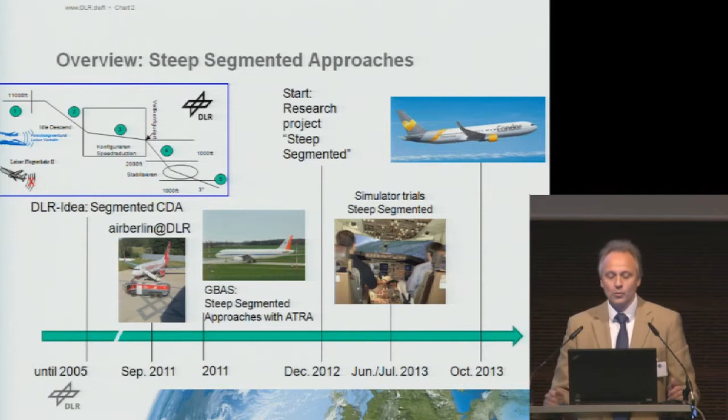A lot of simulator trials with Lufthansa, Condor, TUI Fly, etc. followed suit. And on the 4th of October 2013, that is 3-4 weeks ago in Frankfurt, we also started flight tests with Condor. That was the overview.

Here you can see some further data, beautiful data. In 2011 in Braunschweig, we had steeper approaches of 3 degrees up to 5.5 degrees with a 737-700, and there were 2 points where we had measurements, and there were differences of 3-4-5 dBs with the distances here, and that's really happy - that's really positive, but there were only a few measurements that are not representative. That was a trend where we said,

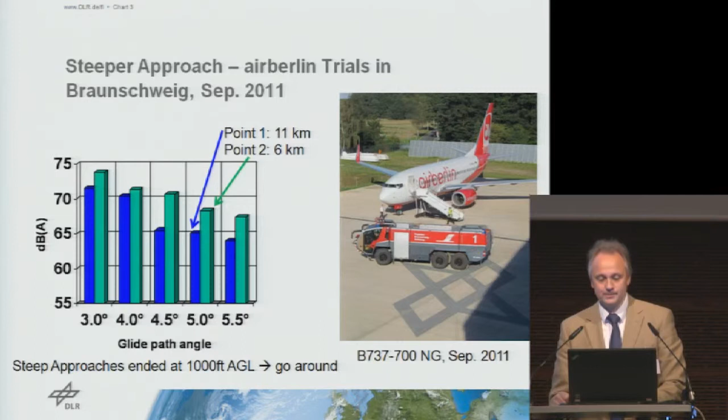yes, that's good. The research project as such has several parts. The first part has been concluded. We studied together with pilots, with our own ideas, our internal people, so we wanted to find how the vertical profile of the steep approach would be designed, so that we can not only do it with our systems, but also with systems that are available in aircraft today. So this is what we tested in the simulators.

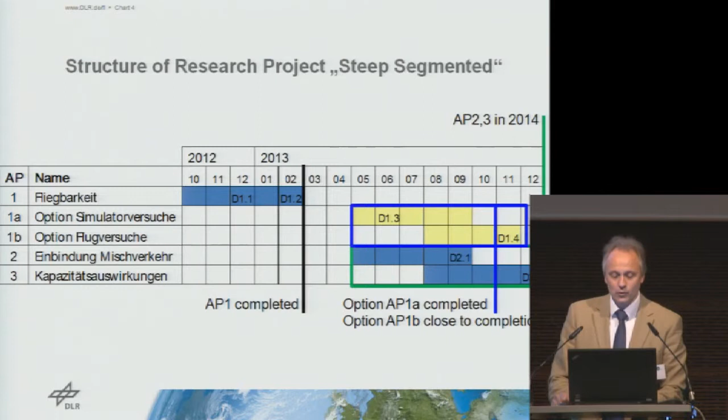And as it worked so positively, Condor said, we want to fly it. So they made an aircraft available. And together with Deutsche Flugsicherung, with Fraport, with the Umwelt- und Nachbarschaftshaus, we did it on the 4th of October and really actually flew it.

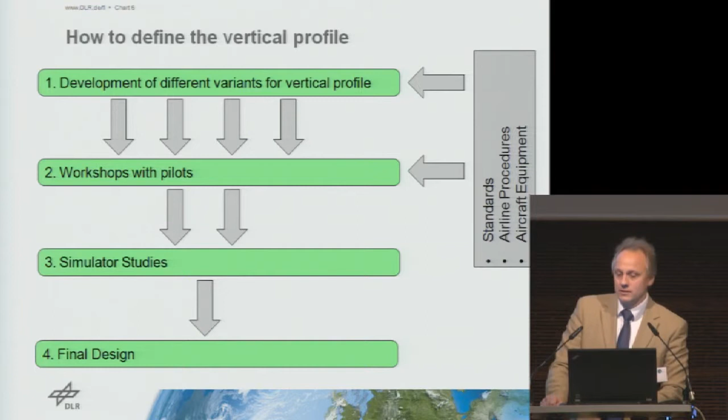Now, we looked at all possible vertical profiles, how you could fly them. We elaborated several variants, and then intensively in several workshops we met pilots, talked about it, and all rules and regulations that we found were used. We produced fewer variants and tested them in the simulator again, 2 or 3 of them, and then we came up with the final design.

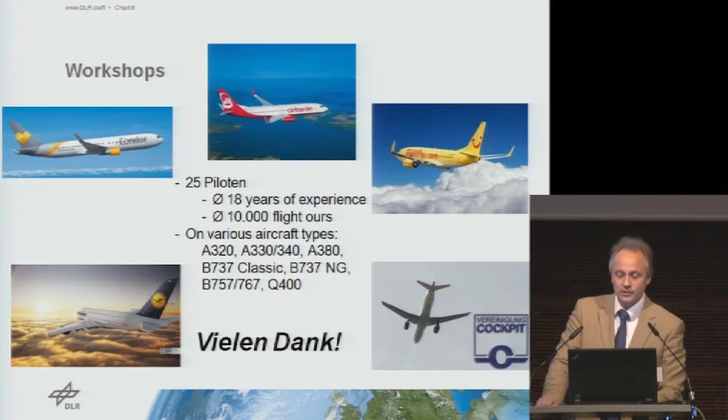The workshops were carried out with Lufthansa, Condor, Air Berlin, TUI-Fly, and pilots of different airlines that belong to the cockpit group - 25 pilots, highly experienced, and many different patterns were really looked at: the A320, the Q400, etc. It was really great fun to do it together with the pilots. Thank you very much to you. In the simulator, we were with Condor, TUI-Fly, and Lufthansa.

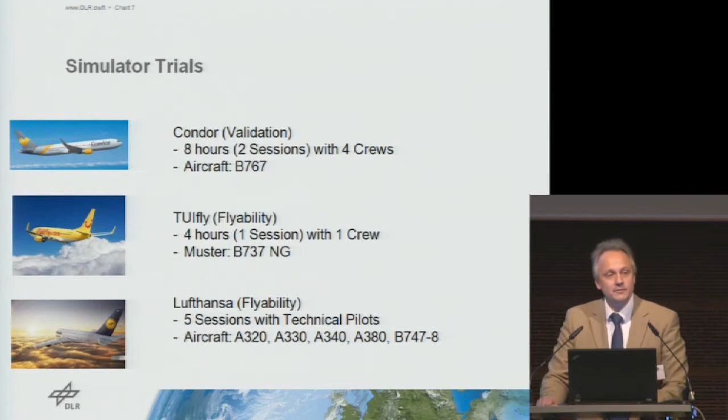767, 737, A320, A330, A340, A380, and B747-800. So all these aircraft flew that route.

We start with 8,000 feet, not 5,000 as we do today, and then descend with 4.49 degrees. You might ask, why 4.49? It must be under 4.5. If I do it at 4.5 with the published glide angle, slope angle, the plane has to prove that this angle plus 2 degrees more can be flown stationary without acceleration. Under 4.5 degrees this is not necessary, so that's a decent limit. So 4.49 degrees was the result then.

That's what we did. Later on we would like to land with 3 degrees on ILS, so we need a transition between the 4.49 degrees and the 3 degrees, so that at the latest, with the typical height of 1,000 feet, we would be completely established on the final approach—landing configuration, landing speed, everything in order at 1,000 feet. To have some margin, if you calculate backwards, this bending point should be at 1,500 feet. In theory 1,300, 1,200 should be sufficient, but then probably you don't have that much buffer. So 1,500, that should be it. There is still some room there.

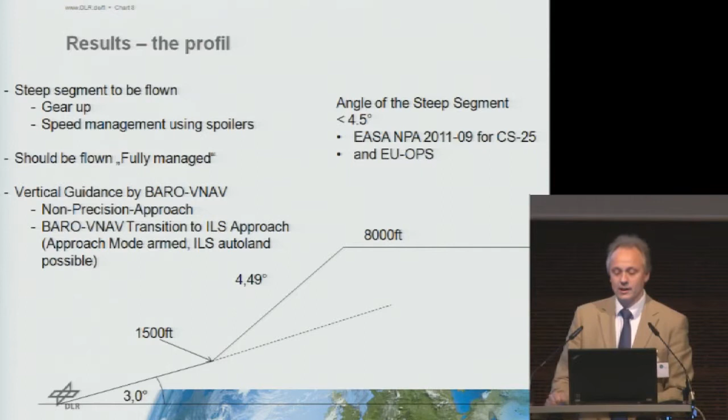The vertical profile, the FMS with BARO-VNAV—that's the non-precision approach. And if we want to land, we have to do it as a BARO-VNAV transition to ILS approach. We have to define it that way so that we can capture ILS and do an auto land. That's the idea.

We tested it in the simulator, where we had the average speed for the steep segment of 400 knots, so it should not be too much for ordinary traffic situation in Frankfurt. And then 170 knots, sorry. And then we determined certain conditions for the plane and the crew: 40 degrees higher temperature, and 25 knots tailwind were added to the steep segment. We heard tailwind with steeper approaches.

It's not so pleasant, but it's possible. You can fly it, also with the landing gear not set. It was possible with the A340 and also the B767. Without tailwind, also with non-set landing gear, we can do it with the A320, but not at the high temperature. And we can also do it with the B747-8. The only plane that required a different procedure is the 737.

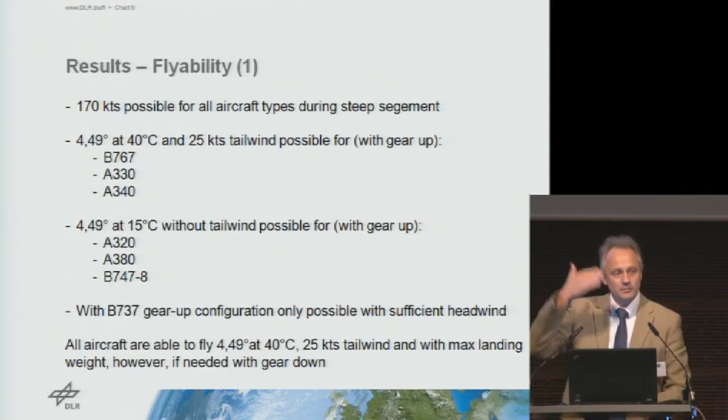Which would fly it only with landing gear not set, with sufficient headwind. Otherwise the landing gear should already be set in the steep segment. But even with unfavorable conditions, also with the 737, with 25 knots tailwind, max landing weight, the 4.5 or 4.49 degrees can be flown. We can do it. It's possible.

And this is what we produced in terms of results in the simulator: flyability, limits for wind, etc. For the A320 we didn't do it, but for the A330-300, 600, A380, 737, and 747 and 757, with slats and flaps, and that also allows the use of spoilers. And that's why there are differences between planes. Third position of flaps does not allow the use of spoilers.

Certain configurations, gear up or gear down, and flaps don't allow the use of spoilers. But the result was also, as we saw in the A330 in the simulator 10 years ago or so, it can do it very steeply with slats and flaps and landing gear not set, and the others are at 6 degrees or 5 degrees.

So 0.5 degrees above the 4.5 degrees—that was our target. But the 747 is a bit different here, it's reaching its limit. The pilots didn't have experience with that, but after a short period of time they were surprised, and basically they accepted it well.

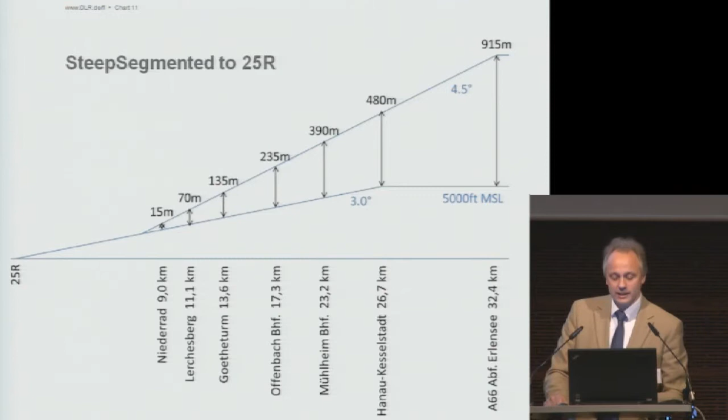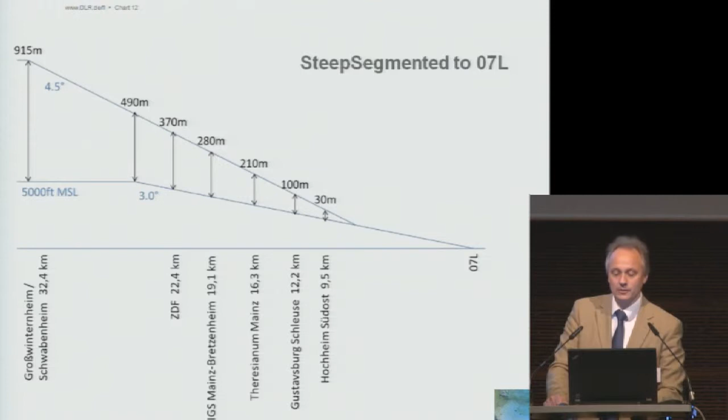And they're only 15 meters high, and that's the normal route, the normal path. Those who know that region, west of the airport, Schwabenheim, or what is it, Großwinterheim, the 3,000 feet higher, but then I go down slowly, and at around Hochheim, I'm about 30 meters higher. All right, so far so good.

Condor was very much convinced that it would work, and then they said, all right, we would like to fly it. Took a bit till we all got it organized with the air traffic control and the airport management and the Umwelt- und Nachbarschaftshaus. But finally, on the 4th of October, it started.

We flew that machine, and we put much more fuel in than necessary in order to have a normal landing weight. And then we not only had our team on board, but a lot of journalists and others who wanted to participate in this project. The DFS...

...put it in the nice picture here. They didn't embellish it. No, I didn't want to say that. For the landing direction 07, which was not so favorable, we wanted to do it in Frankfurt as we had so many measurement microphones because of the 3.2 degree.

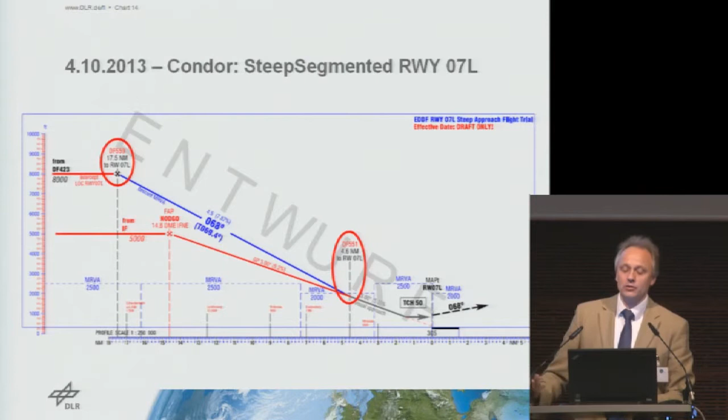But all right, at that very day, we had the wind situation as it was. Come back to the wind situation later on. The steep segment starts at 17.5 nautical miles before touchdown, and 4.6 nautical miles before touchdown, it would go into the normal 3.0 degrees. This is a map once again.

So I can see, does it work? No, unfortunately not. Oh, well, there's a laser pointer, so I can show you. Normally it should work. Here you are. I don't see the mouse, so if someone else shows, I never see how it works, so I rather prefer the cursor.

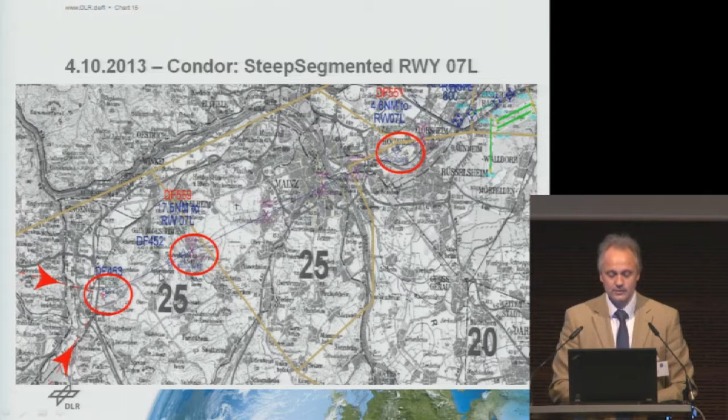We were doing so well that in ordinary traffic situation, 9 of these flights could be organized. 2 were done as a standard planned with 3.0, but we always flew 3.2 all the time. So 2 reference flights, 1 and 8. And then 6 flights were operated in our selected procedure with flaps, 20 flaps and spoilers, for speed management and gear up.

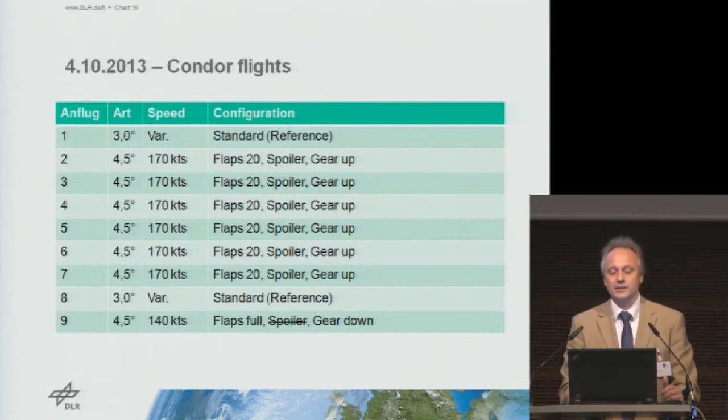Then we made another flight. The original idea of the DLR was used with a much lower speed in the final configuration, 140 knots, and it was always 4.5 degrees, flap full and gear down without the use of spoilers. I always said it was 3.0 degrees, that was the design, but actually we were at 3.2 degrees all the time. Also the reference flights were 3.2 degrees.

That's the altitude profile. It's quite nice. You can see what flights flew 4.5 degrees and which flights were at the standard of 3.2 degrees. And here you can also see quite nicely that the vertical profile was kept continuously.

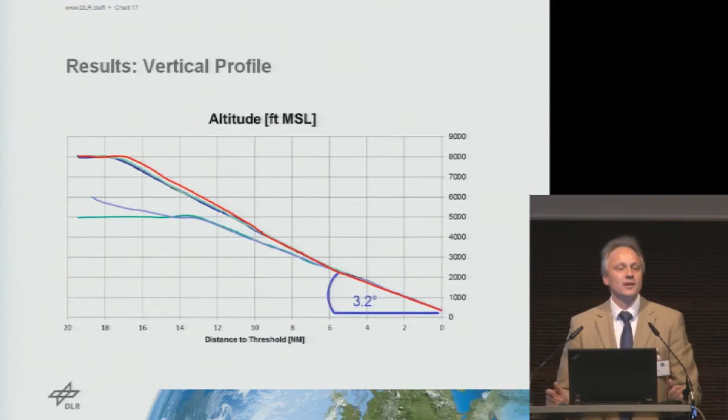And now we had landing direction 07, yes, up to 1,000 feet above the ground. And we had headwind with 1,500 feet. However, the wind turned. And there, at this high altitude, we had up to 20 knots tailwind. During these tests, we did it for the very first time with a lot of journalists on board. And basically, for this procedure, we had adverse conditions. But still, you can see with the vertical profile, it worked out really fine.

Sorry that I have to say it. For a non-testing pilot, it's unusual to do 7 to 9 approaches, one after the other. And even for the flight crew, it was quite awkward. They say, prepare for landing, sit down, etc. For them, they had to repeat it again and again.

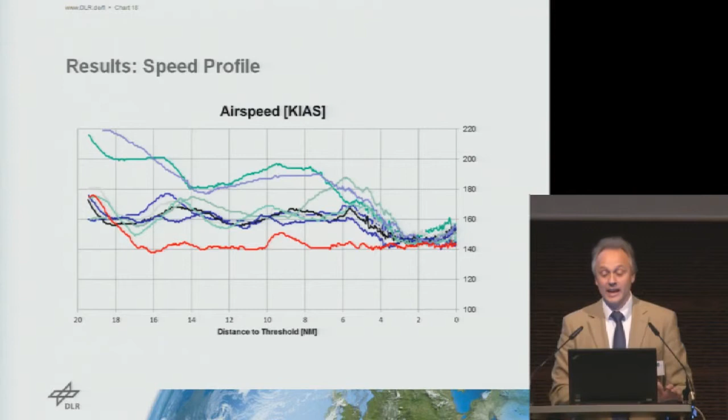But it worked excellently. This is the lateral profile. Only once we went into rolling. For the traffic situation, it was really fit. Excellently, we land, go around, headwind, departure, up and come in again.

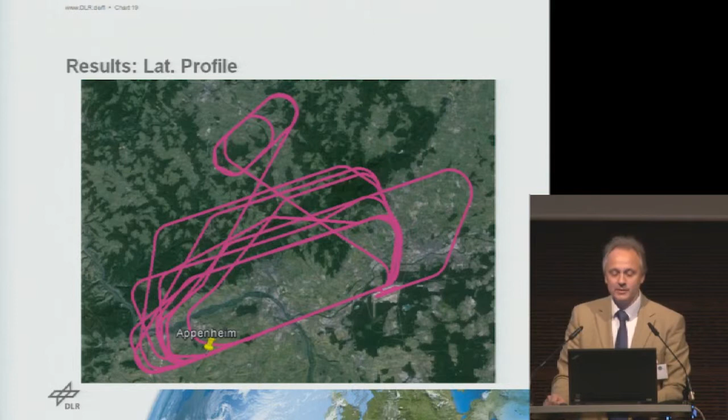Once we turned in too early with the reference flight, not over Schwabenheim. We didn't fly over Schwabenheim, and there you can see what was measured there. There was one station there. On the left-hand side, that's the maximum noise level measured for the one reference flight, and then compared to the steeper approaches.

There we were 3,000 feet higher. And I mean, it goes without saying that then we would have reduced noise levels. That's the 6 dB that we had wished for, and that really materialized. I've got also the median value of the measurement line. I don't have sophisticated dB arithmetic. We heard yesterday that it's not so easy to do that.

Of the 6 measurement values, I produced an average, a mean value, but the scattering is also quite obvious here. 1 to 2 dB. With different approaches and the same speed, same altitude, same configuration, still they produce different results.

On the right-hand side, you can see the time evaluated figure, and in the landing configuration approach, it's not so good. It's clearly slower, so noise is on the measurement point much longer, and you can see it with the LAX here. These are the other measurement stations of the 208, 209, 14, 88, and 11. You have seen them before, and I just click through the measurements that we carried out.

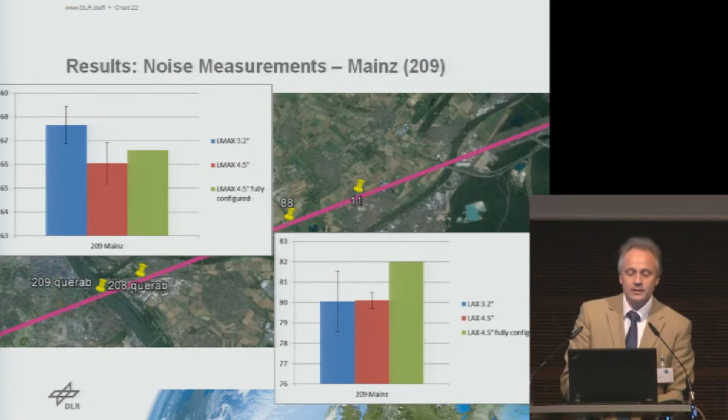And here, at 209 Mainz, we see a reduction. You could look into it, about 2 dB with the maximum noise level. With Gustavsburg, and that's interesting, measurement point 208. It's not so far away from measurement point 209. They are really close by, basically. But still, we have 4 dB here, repeatedly, around about 4 dB.

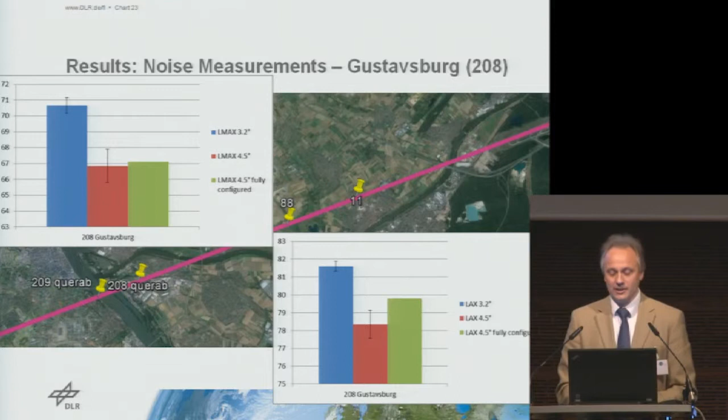I'm not an expert in noise measurements. That's obviously normal, that there is some kind of scattering in noise measurements. But anyways, we will have a closer look at the data that we have from the cockpit and then correlate them with the route data. But we only had them Friday afternoon, and till Sunday evening we had to do this evaluation. So I can't really show you the correlated data. It takes a bit more time to have a more precise evaluation.

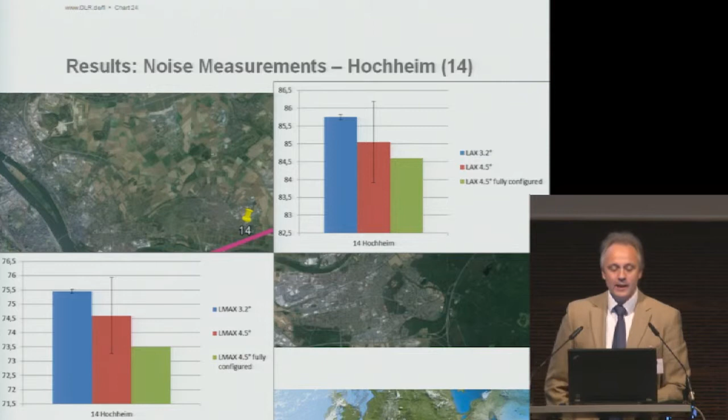In Hochheim, we are at the normal altitude, maybe a bit higher, but not that much. And this is reflected in the measured values. And also you can see here, with the 6 approaches, that there is a big scattering. You cannot easily explain this big scattering, as it was the same altitude, same speed, with the same configuration. The wind changed, however, probably that's the only point that influenced it. I can't really say, but in principle you can see that here.

And then here, this point that was designed basically to set the landing gear, etc. Here we only had a very, very small change of fluctuation. Statistically, it's not significant here. It's more or less the same.

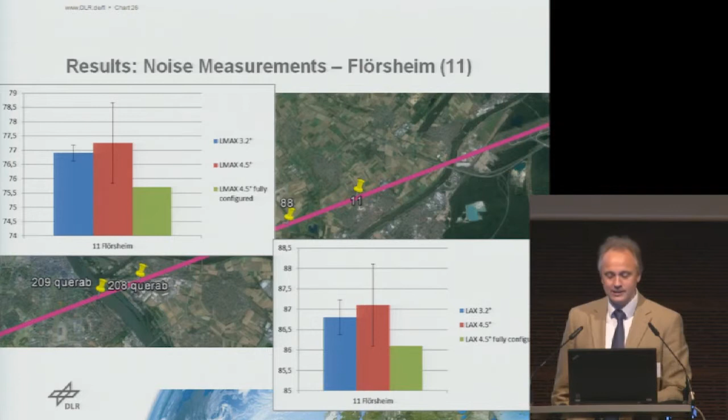Flörsheim, this is really what we didn't want to see at all. Now, if we compare all the measurements there, it became a bit more noisy. That's not really easy to explain. Same configuration, same speed. Why was it? Probably you can have a closer look at it.

And here at the right-hand side in the table, I put the altitude differences at the different measurement points as an average. Oppenheim 3,000 feet higher, Mainz 317 feet higher, Gustavsburg 217 feet higher, Hochheim 22; with the mobile measurement point 88, it was 7 feet less. And Flörsheim we were 20 feet lower.

It's not that we just went down too quickly, but the one reference flight flew a bit higher. Well, and if you produce a mean value, then that's the result. So it was at the upper limit of the 3.2 degrees. What you see here, once again, is a trend analysis, but be careful with it.

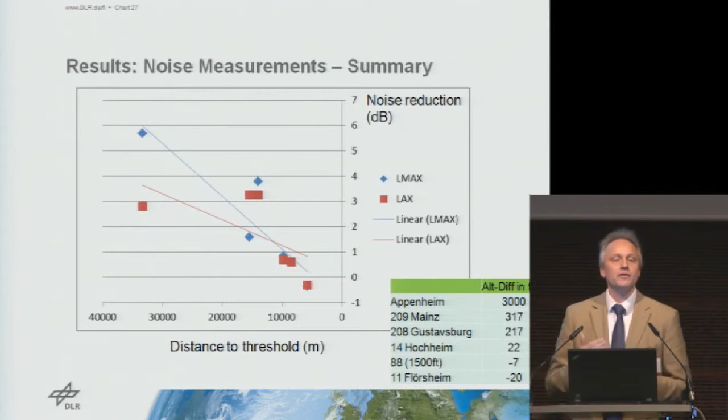We started the measurement with Oppenheim, that's the left-hand side point with 3,000 feet difference, and the mean was then 5.5 dB quieter, and with smaller altitude differential, you also had clear noise reductions. Just to give you the results, there were two tasks that we had to fulfill, whether it was flyable.

We had to determine whether it's flyable not only in the simulator but in real life. And here we can tick it off. Yes, it's flyable, especially during the conditions that we had. And we also had manual speed control. The pilots could adjust the speed manually with the setting of spoilers, so they could keep the speed.

Also, to make sure that always at 1,000 feet they were established. That was all okay. According to the airline procedures, all of them were in a position to land. Of course, we have to change the airline procedures, not only airline procedures, but glide path intercept from above, and this is what we also have to do internationally.

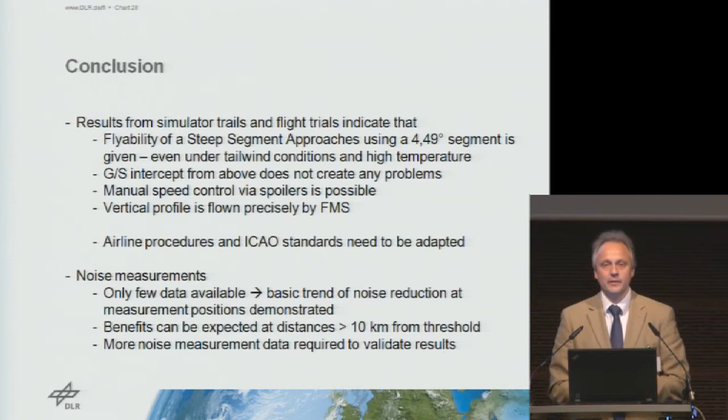Noise measurements, okay, there were only a few data available, definitely not sufficient to produce a statement that withstands further tests. We could demonstrate, right, there is a noise reduction, there is a trend. If you live more than 10 kilometers away from the threshold, you will have a benefit, but we have to do more. Right, thank you very much.

Several questions, but we will allow only a few. So over there, over there, the microphone. To Mr. Kröger. He was the first one raising a hand. Raise a hand again. Okay. The guy from Austro Control was behind me. We had several line of sight conflicts here in getting the word.

Well, once I state something concerning the 3.2 degrees approach, which is done in actual operations, you won't possibly be disappointed if I don't say anything concerning the 4.49 degree trial approach. As you mentioned, it has been designed and started as a research and development trial, I would say. And even among our group, there are some very keen pilots doing these things. I personally haven't taken part.

I actually can't imagine that these things work with so much tailwind. There might be some considerations. In German, I would say, let's try an Elchtest, doing these things in real life. So we are far from that, and I can imagine what we can read in the newspapers tomorrow. So there's a big Erwartungshaltung concerning these things. So you need to be the one on the brake.